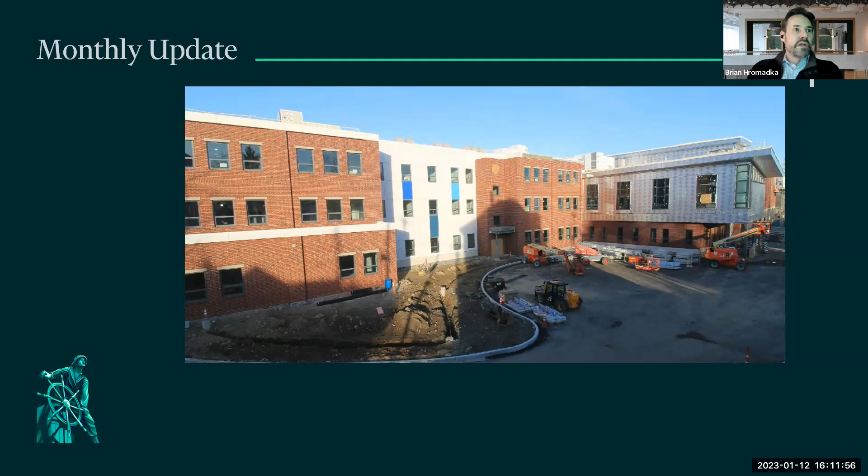So if we go into our summary here, we continue to track on budget and on time, despite the various delays we've talked about in past meetings and also some change orders. We've been able to work through this by managing the cost effectively, doing some resequencing of the work, and making various adjustments to the project as we go along to keep everything moving in the same direction and on time. We've made quite a bit of progress, as you could see on the previous image, on the windows and the curtain wall, and the interior is really coming along as well.

Taking a look at the activities, there's not really much change from last month. We did have 2 holidays, but otherwise the project has been moving forward. We've also been working some Saturdays to make up for the various delays that we've had, and that is helping to keep up with the schedule.

In terms of the project funds, we continue to be in line with the budget. Here you can see this inner green circle continues to work its way up as we get towards completion. You'll notice the designer side is quite a bit higher than the rest, because a lot of their work happened earlier during the project, during the initial study phase and the design phase. So their level of effort right now is not as high compared to those earlier phases.

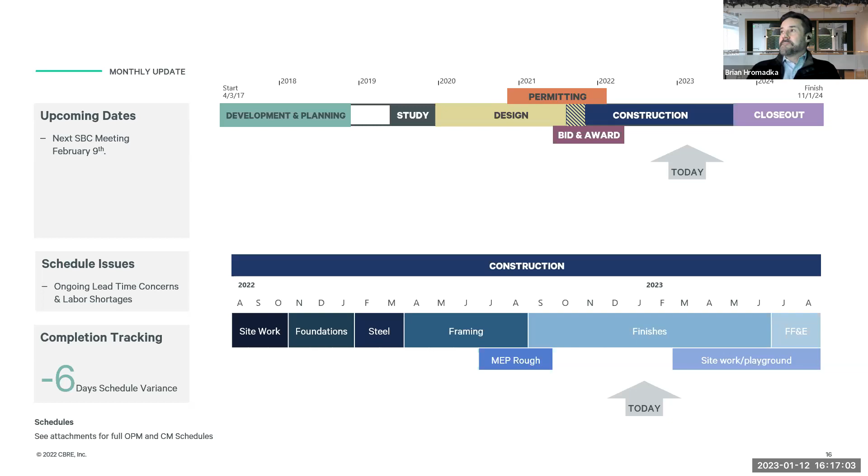So we've also - sorry, I think this slide is missing here. Let me see if I had some images from the teacher tour that Matt did. I don't know if Matt can speak about that a little bit. Sure, let me see if I can.

So last week we had a tour of the building with some of the staff from both East Gloucester and Vets. It wasn't a super large group, but everyone who came through was really excited and thrilled. And of course the whole WT Rich team was very helpful, and Phil showed us all around, gave us some little insights into the building. It was really, really cool.

Okay, Phil was very popular. Let me find the images here. So let me pull that up. Having a little technical difficulty today. I wish I had something more to say. There you go, all right.

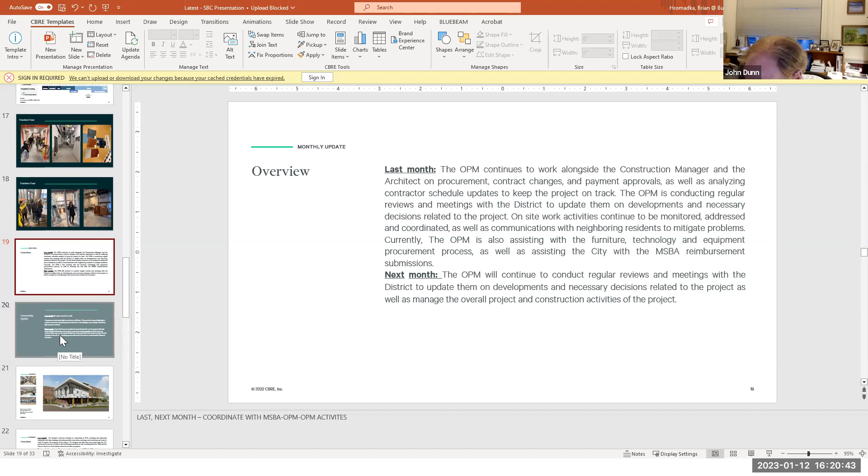Can you provide a little bit of an update? It's in progress, just very, very busy. So we'll try and hop on that tomorrow or Tuesday. Okay, thanks John.

With the community, there haven't really been any major issues, though we did get some complaints recently about some of the noise with the Saturday work, and we've worked to address that. We talked with WT Rich's team, trying to make some adjustments to the timing. There really isn't a lot of activity going on, but with the remaining windows that need to be installed, they have to get up on a lift, and those lifts have little beepers so that when they're moving, people are safe around them. So that is a little bit of a disruption, but that should be wrapped up very quickly.

We do continue to send out emails and notices for any changes to what's happening on the site that might impact the neighboring community. We will have two large deliveries coming up in the next few weeks, and then a couple more towards the end of the month for some of the casework and millwork that's going to be installed.

So there will be some of that, but we've had similar size trucks in the past, and they've been able to move to the site quite easily without any problems. So I don't expect that to be an issue. Moving on to the designer update.

The design team continues to be busy overseeing the conformance with the design documents in terms of what's being built, keeping up with the level of RFIs and submittals that are coming from the CM. They've also been working on wrapping up the furniture package, and we'll be moving into getting the equipment selections done with the administration in the next month or two.

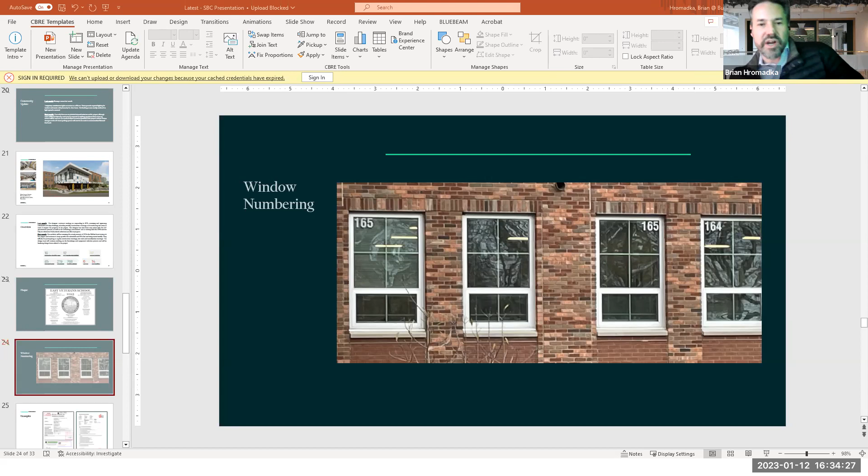It's not something that we've seen on a lot of schools around here, but just recently when I was traveling in a different part of the country, I did notice a lot of the schools out there had this type of numbering on their windows. So it seems to be maybe something newer that schools are doing. But yeah, Ben can share a little more about that.

Thank you, Brian. So as folks may not know, on school buildings, including ours, we have all the exits numbered, the doors are numbered. That helps with emergency response, if first responders need to enter a specific door closest to whatever they're responding to. We are currently in the process of a project to replace all the original windows and exterior doors at O'Malley.

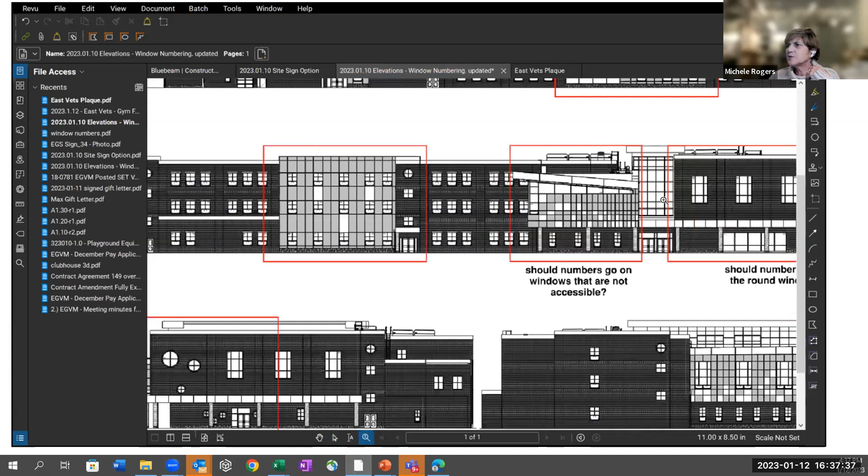So what happens is we begin to number the windows, and you can see here that the windows get numbered. This would be room 000 and 002.

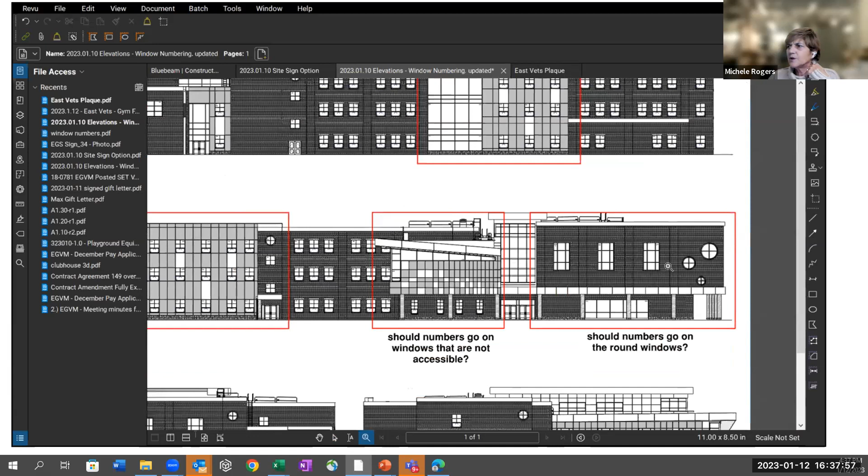And as we move into the classroom wings, you begin to see the different classrooms and how the windows stack up. Some of the questions we have are, do areas like the round windows, do we add numbers to those?

And what about areas where the windows are too high? This would be the art room storage area, and this is the beginning of the art room. Do we number those windows there?

They are out of reach for students, so it's not like you would be helping a student escape from a window of that sort, or even probably entering the window, because this is all part of that classroom.

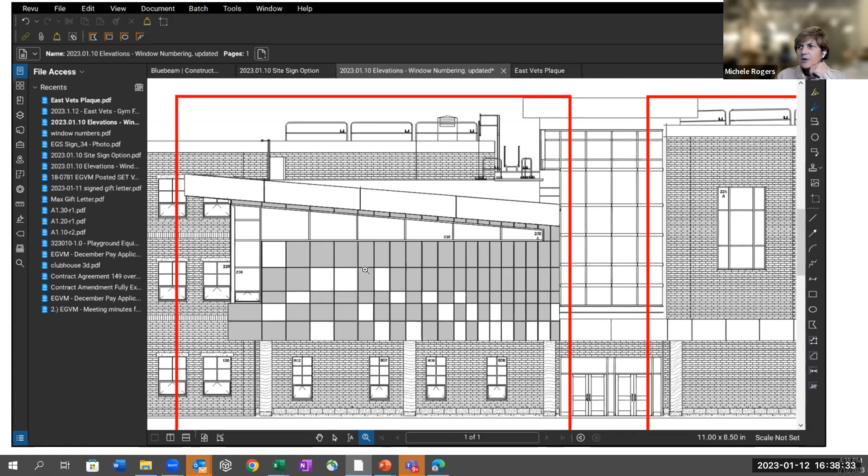So some of these windows we want to talk about independently. We also want to know about windows that are super high, like within the stairwell.

The stairwells are numbered, but does the top window get numbered as well? I don't know if anybody has any thoughts about that at the moment, but we can talk about that.

And then in the extended learning area, you would have each of those areas numbered within those larger panes of glass.

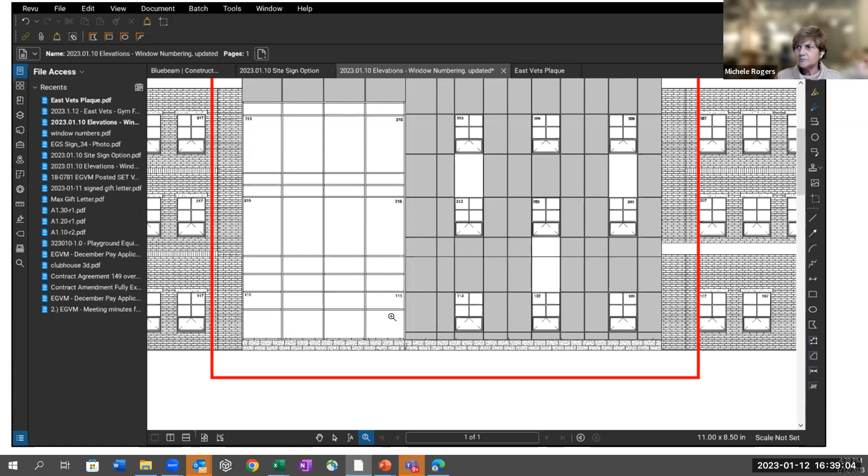Okay, any comments, any ideas? Well, I don't think that it's necessary to number those big round windows, because we know that's the gymnasium. I think everyone would sort of know that, but that's just my opinion.

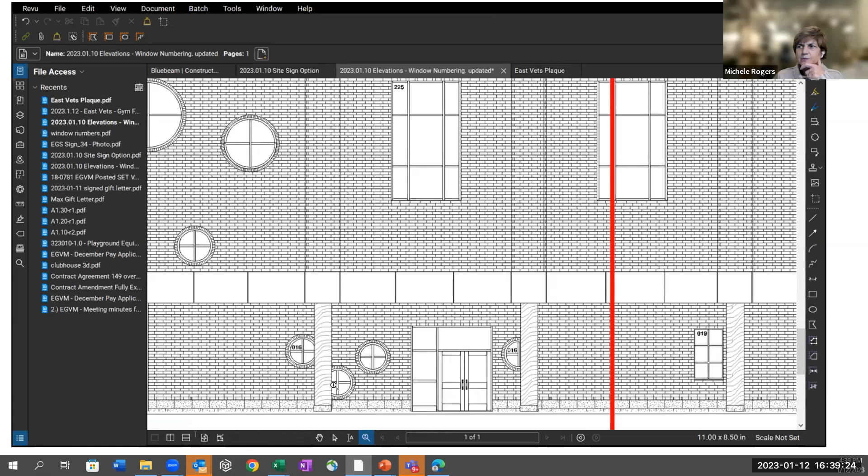Right, the door will be numbered, and you'll be able to see that this is part of that same vestibule. And when we turn the corner, the large area of glass in the cafeteria has a number on it.

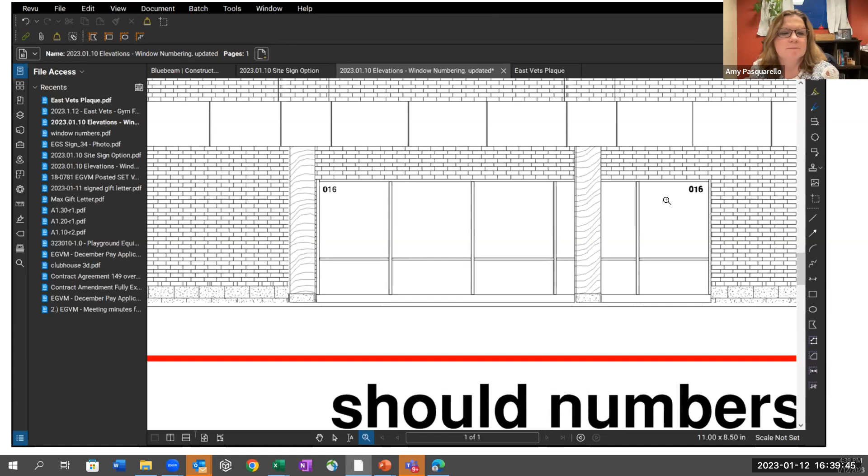I don't like numbering the round ones. No, thank you, I aesthetically agree. It doesn't look good, they're decorative.

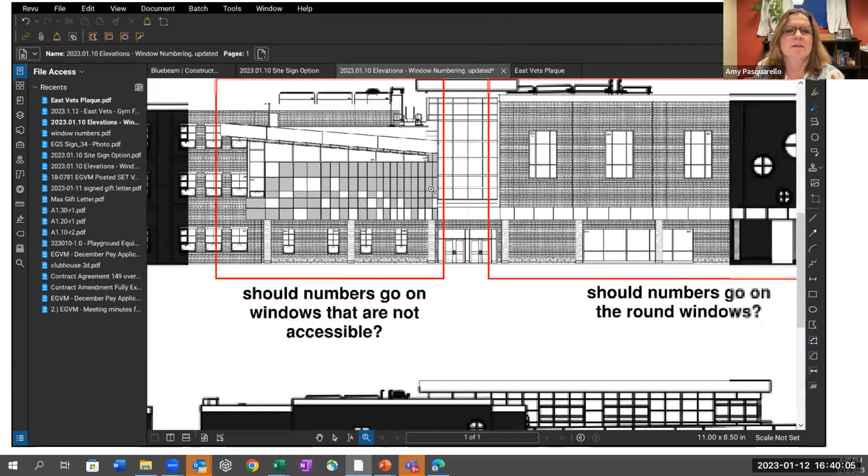And I also don't think it makes any sense to put numbers on the windows that are the clerestories up high, that's just not necessary. The art room, I agree with that. Art room and the art storage is not necessary, and the top of the stairwell. Michele, can you go to the art room?

So this is the art storage room, and then the art room starts here and goes all the way to the end. This is the back of the building, this is the front.

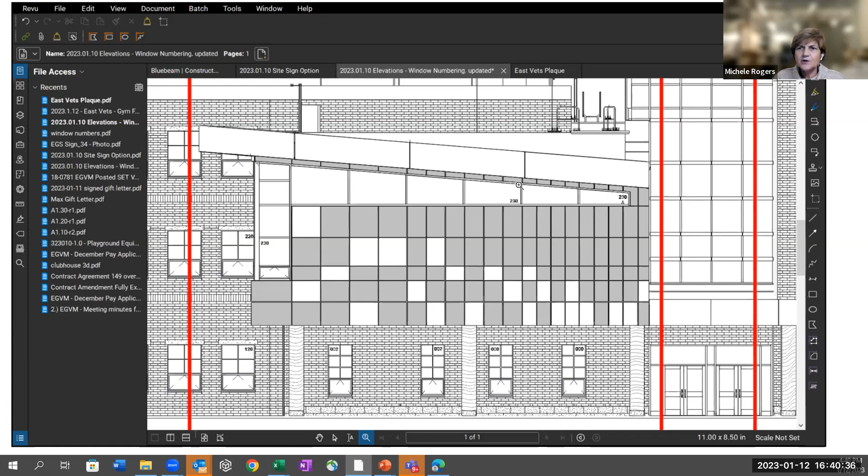Tony, you're on mute. We wouldn't have an identifier where that room ends if we didn't have that second one. It's in the third pane from the right.

Well, this particular room, not that one. You wouldn't know that it ends there.

You'd know these windows are quite high, but I know you're talking about identification from the exterior.

So if you don't have anything on the window where the room terminates, I don't know, if there's something going on in that space, how are they gonna know where the room terminates?

Do you understand what I'm trying to say? What's happened at other schools is that they would number the first window in the room and the last window in the room, so that you could figure out where the space begins and where it ends. That's what this is, the first and the last.

Yeah. So are we talking about not having that last one on that high window?

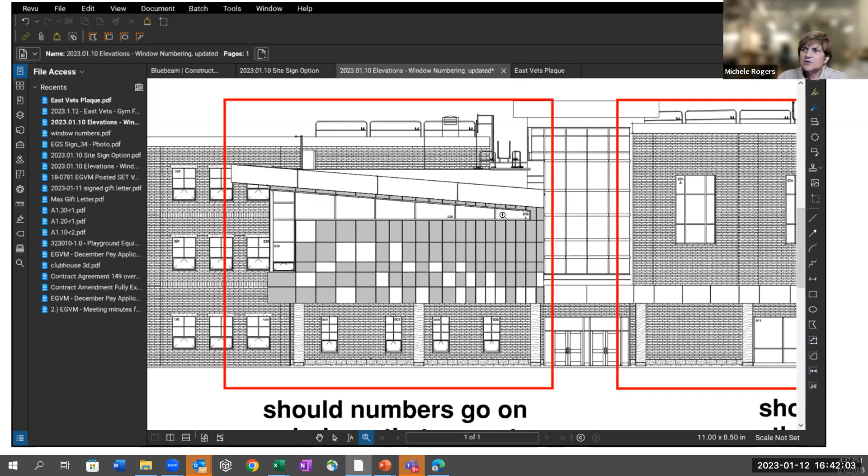We'd actually also have a number in this window here, which is the storeroom number. And if we think about it, it actually spans the entire length of that art room.

I would think it would just be like for all of the academic spaces, primarily maybe the stairs, and then maybe we could get some guidance from public safety in terms of, do they need a start and stop, or do they just need one per room? You know what I mean?

I mean, what is the signaling, what is the message that goes to public safety from whatever's happening in the school? My theory is, we're in the art room, it's on fire, they're gonna know where the art room is.

It makes it important for the other rooms, the non-recognizable rooms, but the gym and the art room and the cafeteria, that's what people are going to say. They're not going to say I'm in room 107 and have it be the art room, I don't know.

I think that's right. And they'll also have the evac plan. Yeah, so the evac plan will correlate to the room numbers.

And so I would think, but again, maybe we can get some confirmation from them, that so long as we have a number on a window in the room, I would think that would be what they would be looking for.

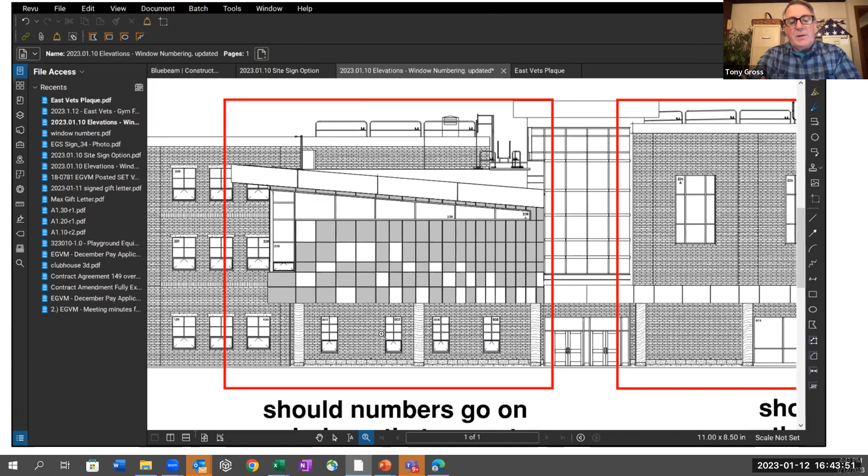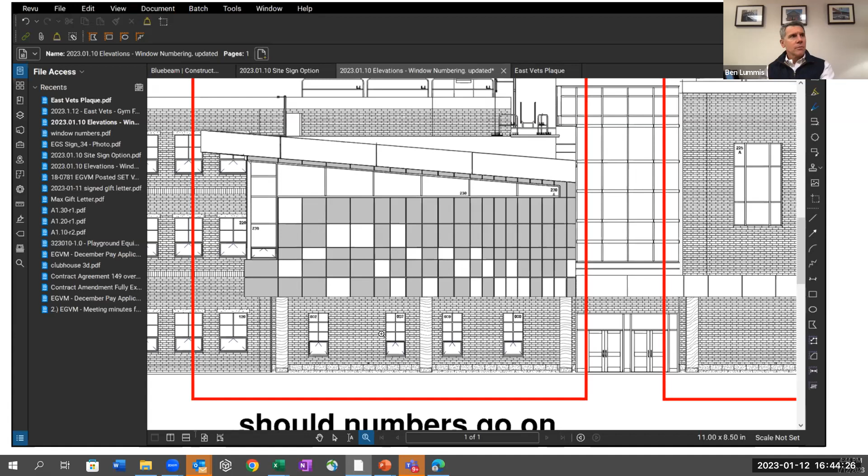Ben, did I hear you correctly that the chief of police and chief of fire asked for it to be on both ends of the room? I'm just checking now. I thought that's where that idea came from. I can't remember if it was from them or from our designers. Hold on, let me try to track this down. If folks keep going, I'll see if I can get the answer for you.

I think what we want to do is see if there's agreement to move forward with this. Sounds like people understand the additional layer of safety provided by putting the numbers on the building, and also understand this would be an additional project cost. We don't have an exact price until we get the details figured out, but we're probably in the range of maybe $8,000 or so, plus or minus.

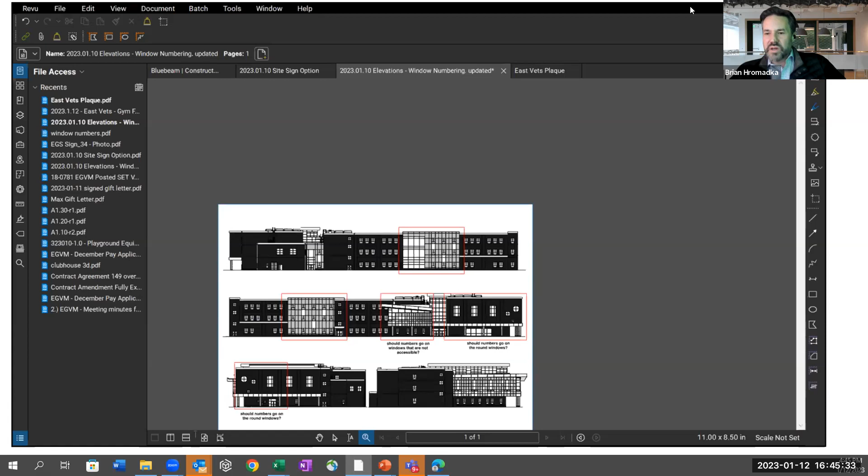So what would they be, vinyl stick-on numbers, or painted on? I think the police or fire provided an example of what the numbers would look like, reflective film numbers stuck to the windows, adhesive film. And to respond to Tony's question, that suggestion about the first and last window came from our designers on the mailing project.

Thank you. I just think on the major rooms where that is an issue, like the cafeteria and the art room, that should be recognized - you say we got a fire in the art room, and since they have the evac plan and the floor plans, this makes it a little simpler, especially being on site there.

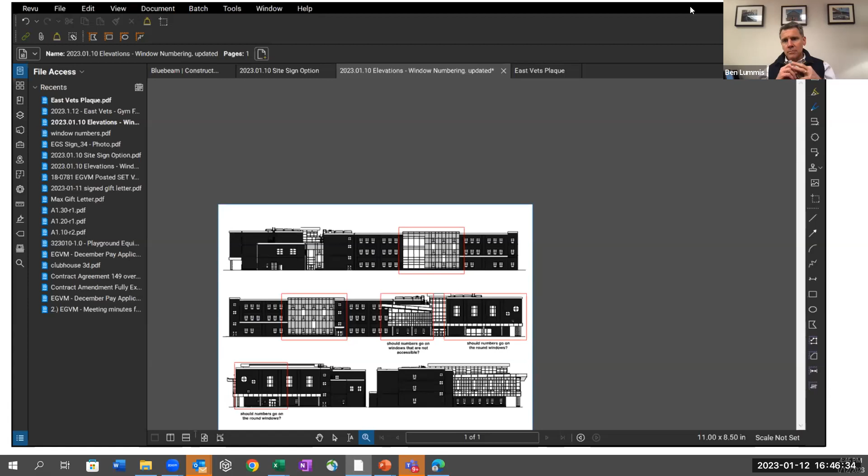But Brian, would it be okay for us to put forward a motion and leave some of the detailed blocking and tackling to the project team? I suggest we have a motion to move forward with this, with the understanding of generally what it would look like and the costs associated. Then Dore and Whittier can provide the information we currently have to public safety to get final comments on whether we need an additional number in this place or that place.

Just one more question - do we want to label it with the room number for the art room, cafeteria and gym, or with art, gym, and caf? I think those are details we can work out with public safety, that's really who this is for. That's a good question, Nick, because it does make it a little easier to recognize.

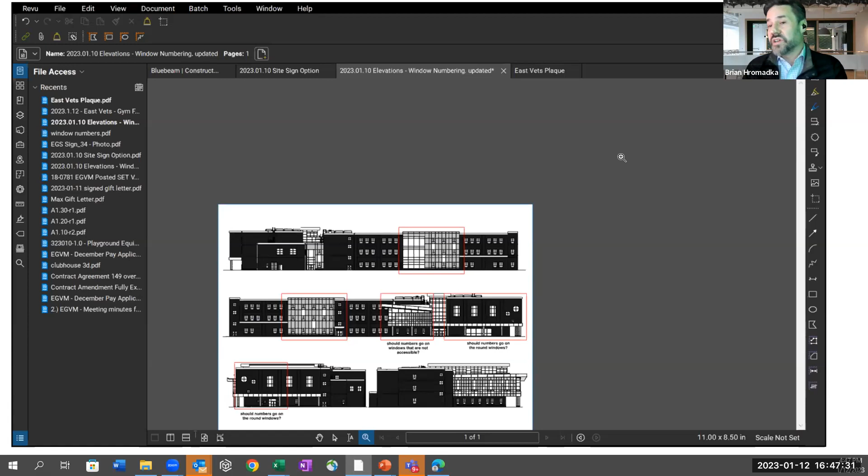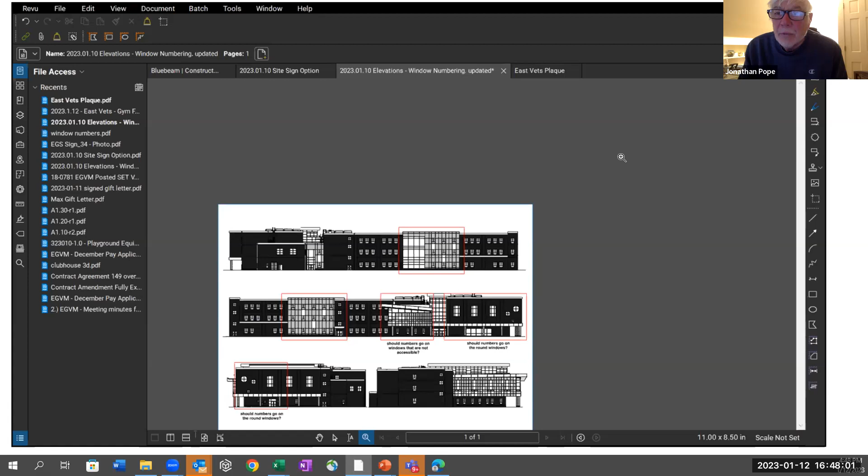I'll make a motion that we authorize the designer and project manager to consult with public safety about how they would like to have rooms numbered, but to proceed with a plan and proceed to number the rooms on the windows. Second. That's kind of vague, but it's the best I could do. Good effort. Any discussion? Okay, can we have a roll call vote?

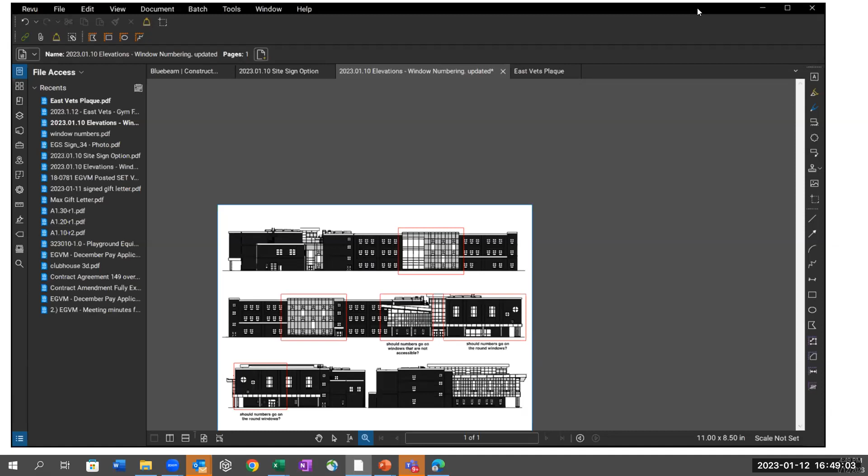Jonathan Pope, yes. Ben Lummis, yes. Katie Clancy, yes. Richard Safar, yes. Matthew Fusco, yes. Amy Pescarello, yes. Grant Harris, yes. John Dunn, yes. Gary Fish, yes. Caitlin Nunes, yes. Tony Gross, yes. Stacy Cabon, yes. It passes unanimously. Thank you very much.

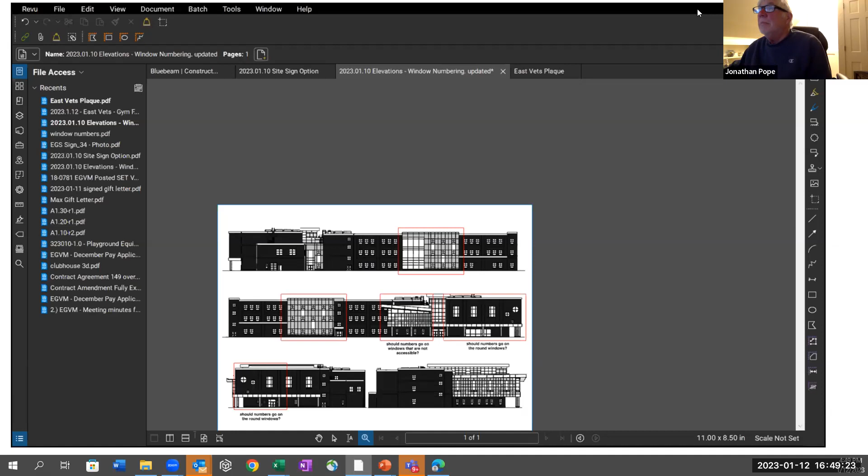So if we can switch back to Michelle on the exterior. Oh, there we go, exterior sign. This is also something we've been reworking to get it just right, so this is the final iteration that we have. Michelle, you can talk us through some of the changes that were made and why this is what we have here today.

We presented the working group with a couple of different signs and different options for materials and dimensions. What we wound up with was going a little shorter in size and longer in dimension, which helped spread out the lettering on the name as well as shorten the overall height.

So the sign itself is more rectangular than square. What you end up with is a sign just under 5 feet tall. The top is cast stone, and the base veneer stone matches the stone on the building, and the brick veneer matches the brick on the building. The address will be 5-inch letters, and the name of the school will be 7-inch letters.

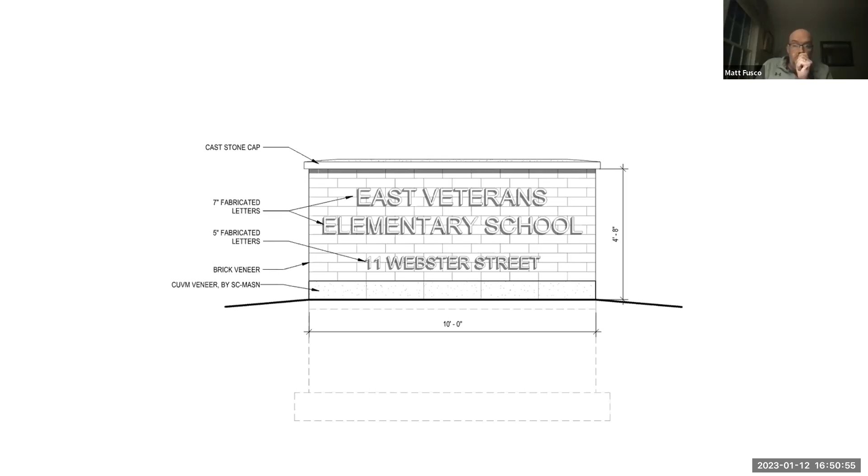If you look again, using West Parish as an example, the 7-inch letters are what we have over at West Parish. The address was only 4 inches over at West Parish, but it's slightly larger here.

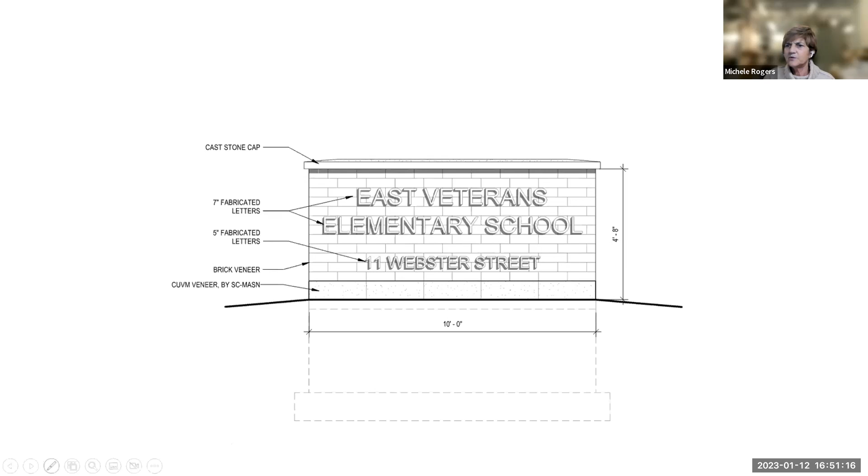Let's move to show how that's going to look with the building. You can see it here. It sits out front between the two entrances, the main entrance into the school and the bus entrance. As we move around, you can see it from the other side. It's double-sided, so you'll see it going both up and down Webster Street. I also added a few of the numbers in back there, so you can see what that looks like too.

So this is where we landed for the sign. I don't know if anybody has any comments about it.

I like it, I love it. All right, I'm done, I'm going to quit while I'm ahead. Two votes for it, I think it looks great, really nice. I think Matt's upset there's no statue of him up front. That's coming, that's what the art garden is for. It'll be a cardboard cutout, we'll take it out at the holidays. There's a spot, there's a spot.

No, it looks good. You're not going to plant a whole bunch of shrubbery in front of it, right? Just a couple of things. I'm glad you said that, because we need to make sure we don't block the cameras. Don't let the trees grow up and cover the cameras.

Can we get those two photos sent to me, Kathy Clancy, Amy, and Matt? They're great — renderings, I guess, not photos, but they're great renderings, and that's why I want to have them.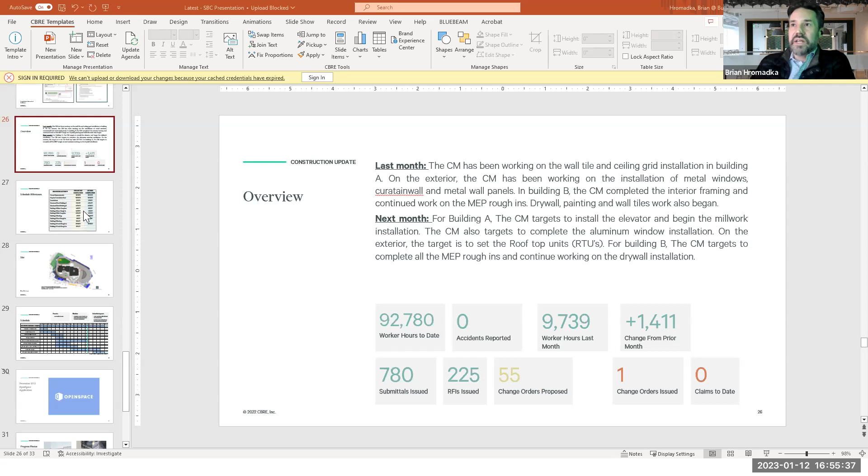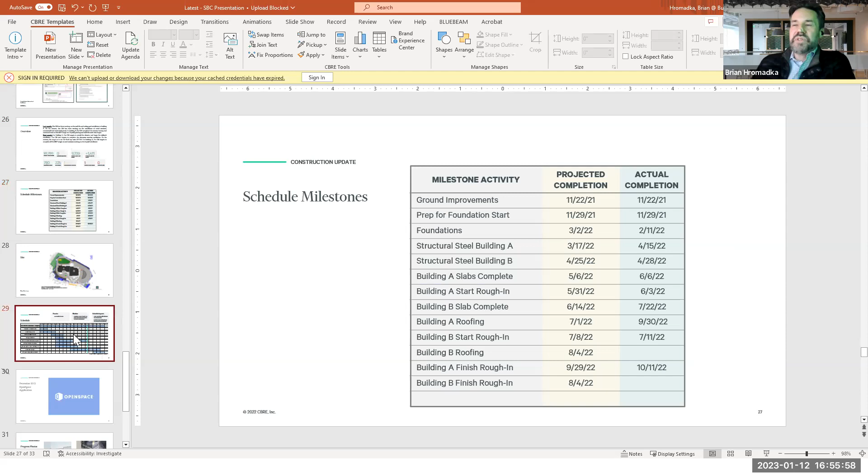So no new updates on the milestones. I think we've talked about this before. These are milestones that were created at the beginning of the project. The actual completion on some of them is earlier and some of them is later, but that's because of a lot of the changes that had to be made in the sequencing of the work due to various delays. But we're still overall tracking ahead on time.

We've also had some weather delays, not a whole lot. We've actually been very fortunate in general with our weather this year. It's allowed us to do a lot more work on the exterior than we would have otherwise. Even today, we had site workers doing some excavation and backfilling. So that's really been very helpful.

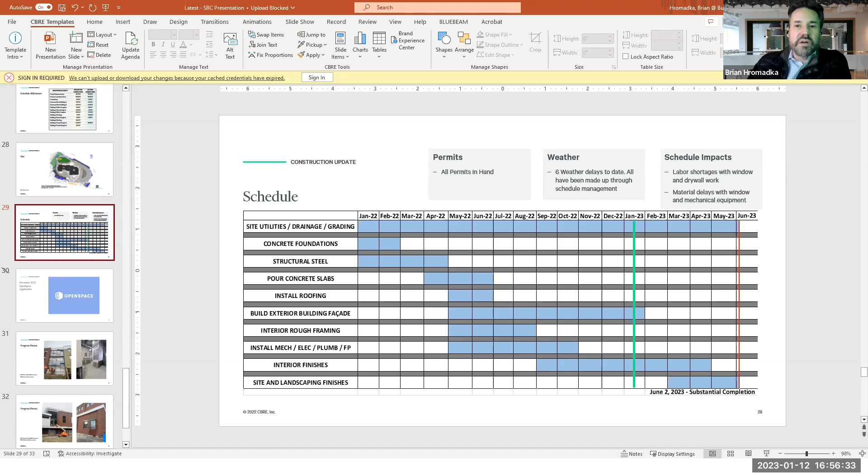So I can turn this over to Alex to do the OpenSpace walkthrough. Thanks, Brian.

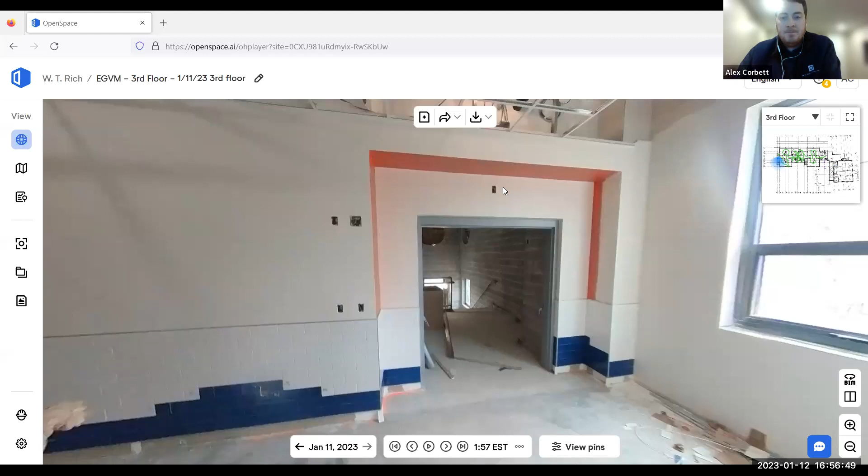Can you guys see my screen? Yes. All right, so I'm going to bring you through the third floor. Matt and others may have seen this already, but I think it's good visually to kind of refresh a lot of the people that didn't get a chance to walk the other day. So, as Brian mentioned—Alex, that's Tyler, right? Correct, yes. Wow, yeah.

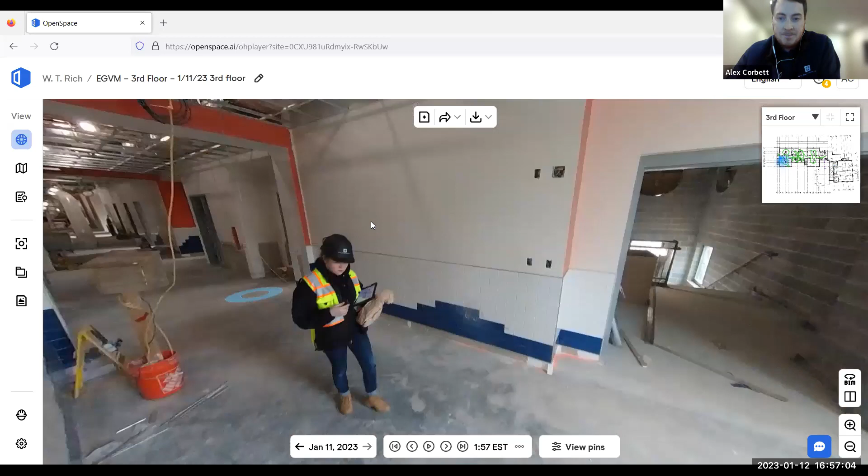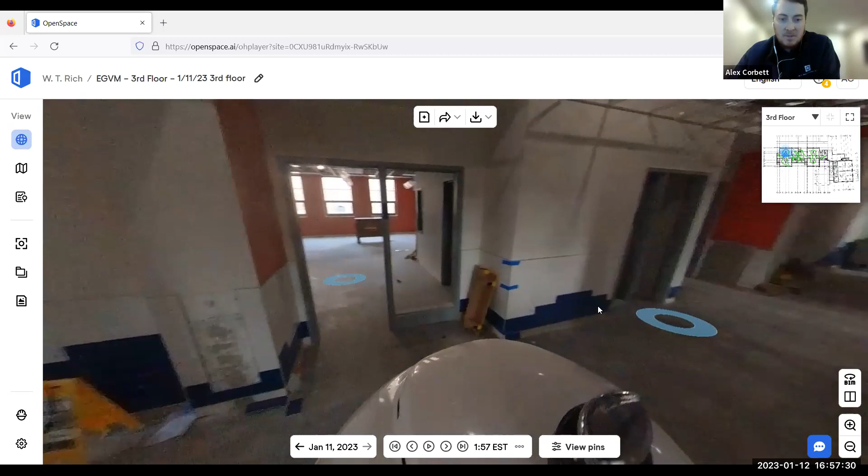So yeah, we've got drywall accent paint colors starting to go up. Actually, all the walls in the corridor are actually painted. We've got a good push on our ceramic tile. As you can see, I won't try to describe what it is, Michelle, but I believe it's something to do with water and waves. The wave. Yes, it is.

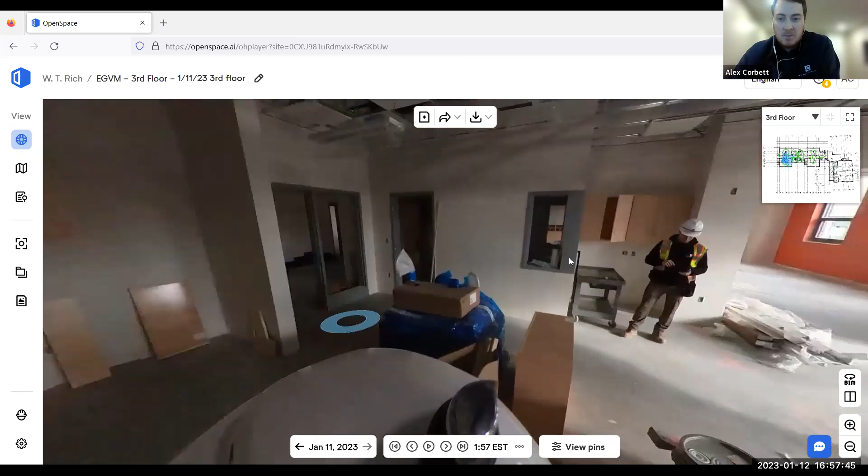So I'll take you into one of the classrooms that's actually got millwork starting to go in. So obviously we don't have the permanent lights in yet, but you can start to see how some of these rooms are fitted out with the casework that's coming in.

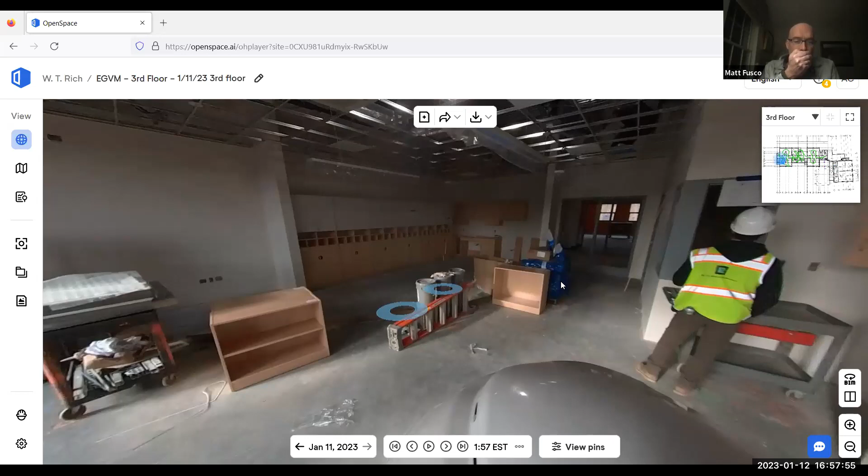One of the challenges we face is obviously, as some of you may know, casework, wood in general is tough these days, especially coming from Canada. So these showed up a few weeks later than we really wanted them to, but the guys are doing a pretty good job of getting them installed quickly.

So you can see those cubbies, large tall cabinets. You've got 2 sinks on this wall as well. You can start to see the pendant light fixtures being installed here. And then the window wall, you can really start to see how that's coming along with the accent and the built-in cabinets and the window bench that we were able to get back into the project, which is a nice feature into these classrooms. Awesome.

You can also see the track for the folding panel partition. So that's kind of the divider wall between the 2 classrooms, as you guys be aware of. We're expecting flooring to start going down the next couple weeks. That's that marmoleum vinyl tile that a lot of schools are starting to use now. So the next couple weeks, these rooms are going to get pretty much in good shape to finish off.

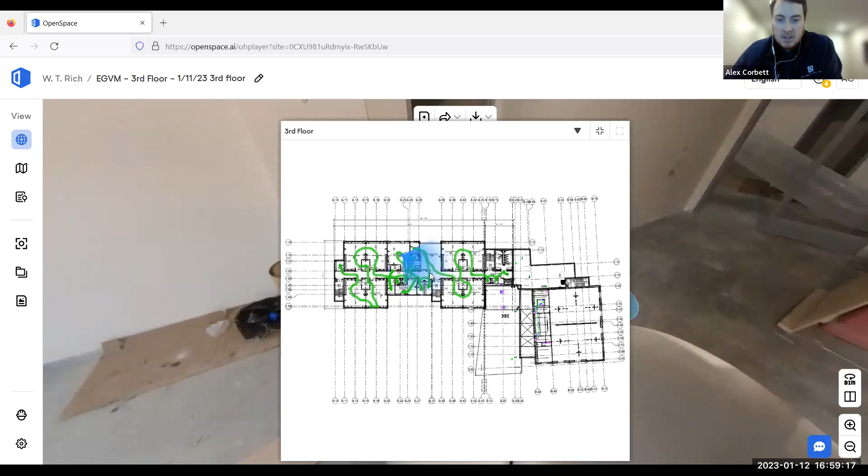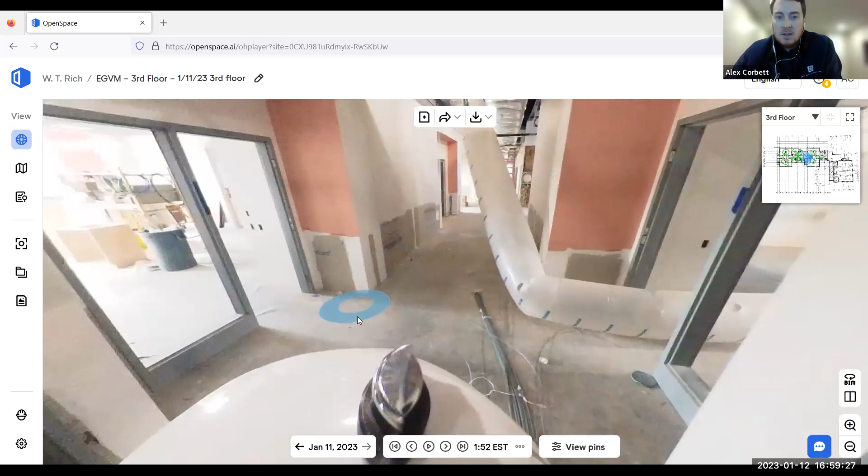I'll bring you down. Let's see if I can get more of the corridor here. We're working our way, I guess west to east, in terms of that wall tile that you saw in the previous photos. Let's see the paint colors as they change from corridor to corridor, or pod if you want to call them. The cluster of 4 classrooms, I believe the color changes there.

Michele, again, feel free—no, you're doing a good job. It changes per grade level. So if you have 2 grade levels on the same floor, the color changes. Yep.

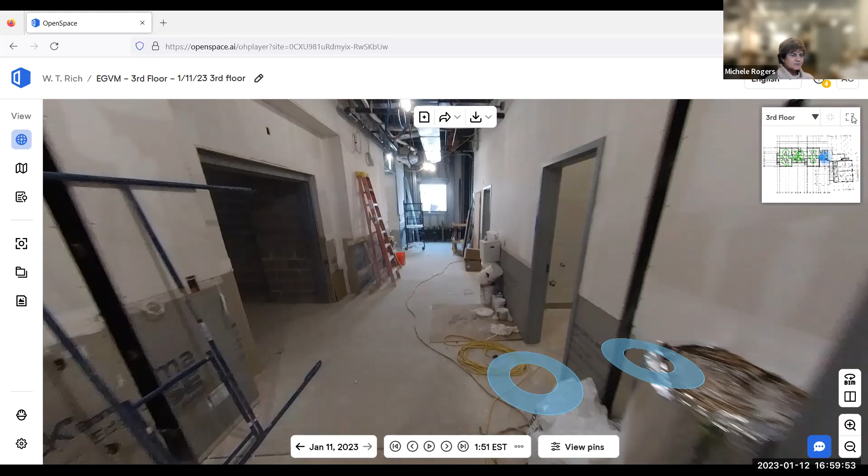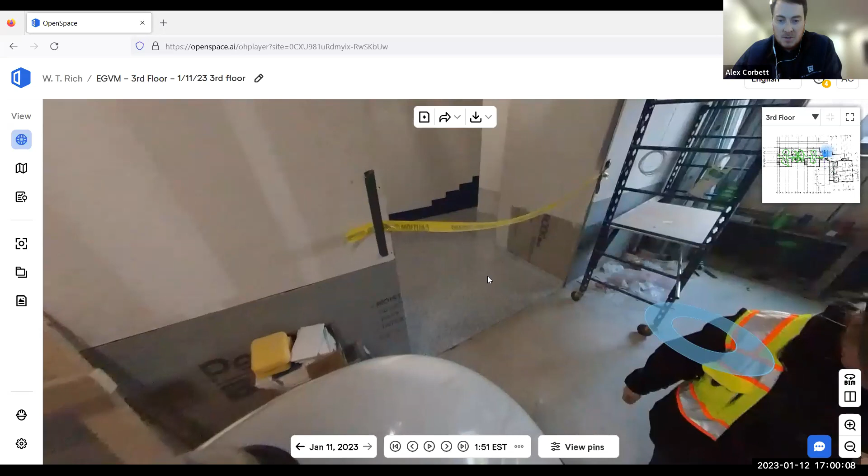I'll just bring you down towards the end of this corridor. This is one of the first multi-student or multi-user student toilet rooms. You can kind of see here, we have that epoxy floor that was just installed. It's like something that you see in the garage, obviously much nicer for the school, but it's got that flaky resinous material. You can see the wall tiles complete in this bathroom.

So we're working our way out of those bathrooms and wrapping it into the corridor. I wish the photo was a little bit better, but trust me, it looks pretty awesome.

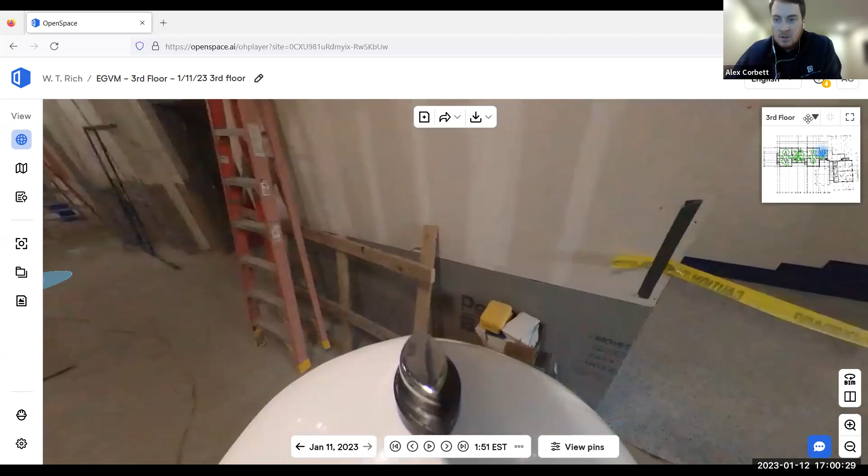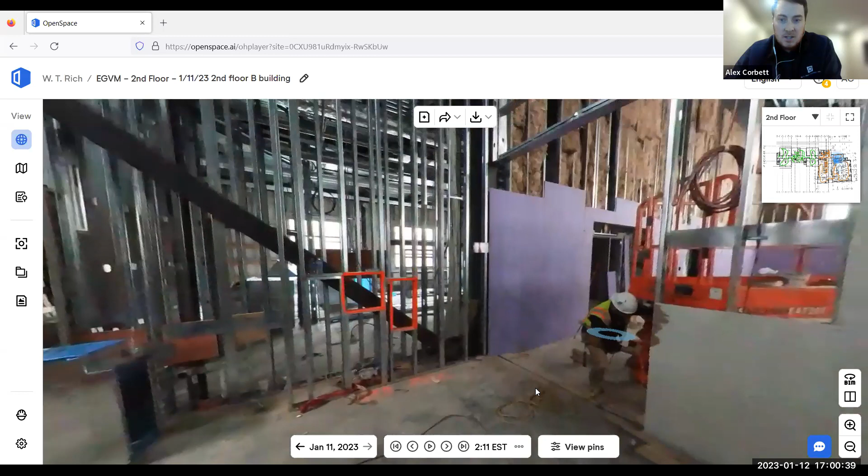I'll bring you down to the 2nd floor, some of the larger spaces, like the gymnasium here. We can get in there. Starting to board the gymnasium, insulate and board. Looking at the stage and the proscenium that'll ultimately get boarded and finished off with millwork surrounds. But you can start to see, when you're in the space it felt big, and now being finished it really kind of starts to feel like a gym.

So in the next couple of weeks, we're going to paint out the ceiling, paint the walls, and then get the gym equipment starting in there. So this space is going to come along pretty quickly as well. You can see those large round windows that you probably saw from the exterior.

Some of those spaces - we're actually standing on the stage right now. Let me take you to the art room.

So, workshop area with the kiln here, still needing to be framed, but again, for the most part, the art room has taken its full shape.

This is the overhead door. It's sort of a decorative glass garage door, for lack of a better term, but it's going to be a pretty sharp opening between the art room and the media center.

Let's see if I can get you in the media center too here. Look at those beautiful wood beams - yep, so you can see the glulam.

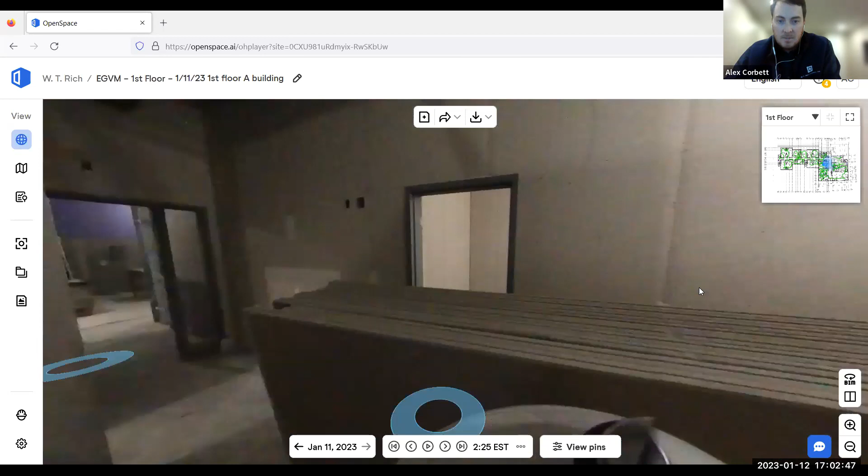Admin's taking shape really nicely. The lighting's obviously not great here, but we're essentially all boarded out in this admin suite - all offices, nurses suite, principals' offices as well, all boarded out. It doesn't really do it justice through this walk, but you can really start to see the size and the makeup of those rooms.

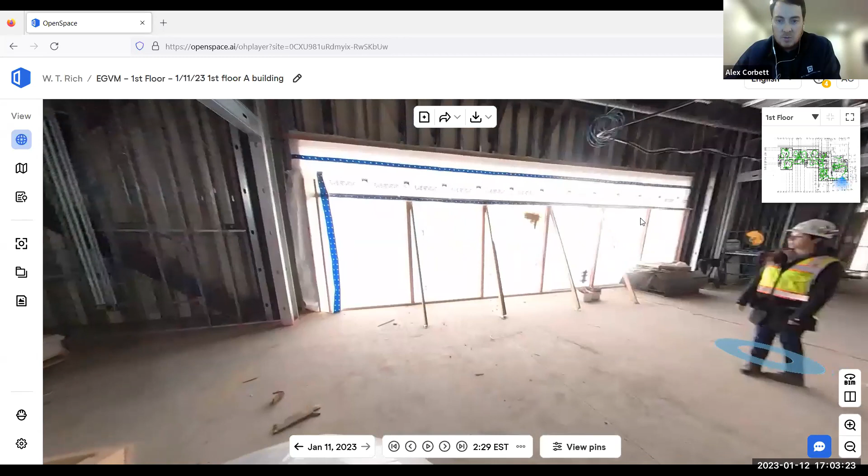The cafeteria - you've got another roll-up door here. It's a roll-up grill, actually. And then you get into the kitchen space.

Actually, this is the custodial area. Let me see if I can get you in the kitchen here. Yep, here we go. So this is all going to be trimmed out with stainless steel, food service equipment.

There's a wall right here with additional food service equipment on that side. This is actually the cooler freezer void, so we're going to start getting the cooler freezer in. The hood for the grilling apparatuses will go in as well. And then we've got a single user toilet room in the kitchen staff office space back here.

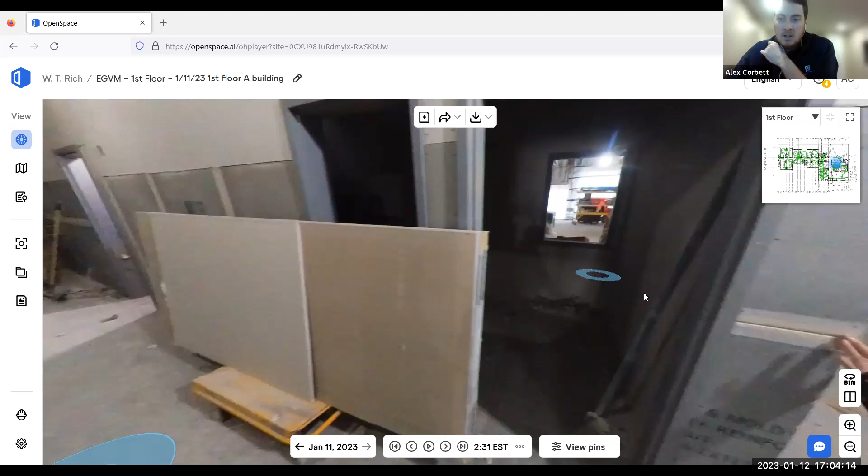So hopefully the third floor A building classroom wing gives you a good insight into how we're progressing on second and first floor. And then obviously you've got some atypical spaces in B building with the gym, the art room, the media center, and the cafeteria.

Does anyone have any questions? Tony? Yes, Alex, I got a couple.

On the schedule milestones, it has building B roofing not complete - what's left up there, or is there just no date on the actual completion? The roof's complete, it may be some accessory things, but we're completely weather tight in B building. What we consider roofing complete is basically weather tight, able to do stuff below it.

Maybe throw a date in on that then. Yeah, and in the latest update I saw that too. I was on the roof today and everything was tight, so - well, I would hope so.

Also, Alex, you mentioned that the tile was complete. Is that stair step type image? Is that how it's going to be, or is it going up the wall halfway as far as the Durock? It's just a wainscoting, I think it's 3.5 feet high. It does go up halfway.

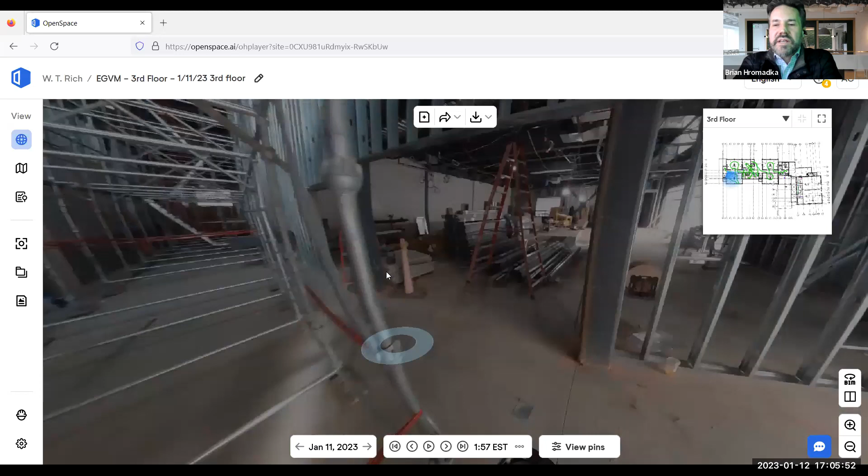Okay, so it's white tile, so it's hard to see in that photograph. Oh, I see it now - this is the top of the wall. Yep, I see the white tile now.

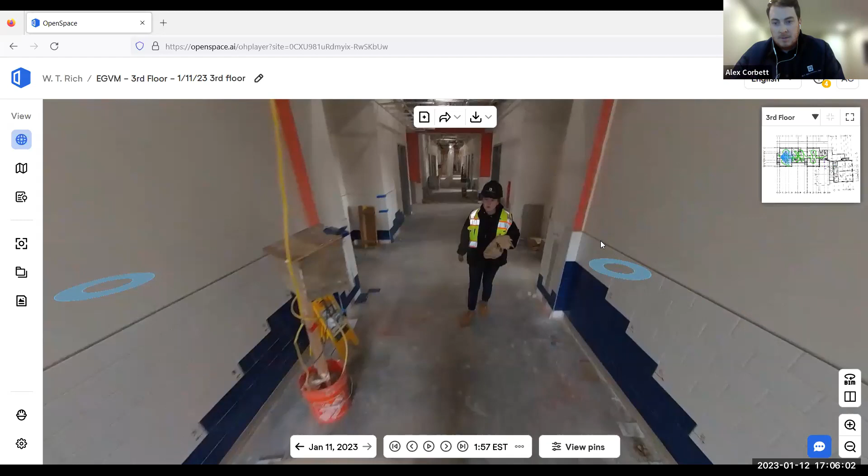In the gym, is there going to be any kind of protection on the walls going up 8 feet or anything? So we have wall pads surrounding, right? I believe those are 6 feet high. So yeah, you should be pretty well protected in there.

Just a quick question - is there a dishwasher going in this building or no? Yes, that's weird you asked that because we were just talking about that today, because I know we didn't put it in West Parish, right? Yeah, you've got a pretty robust dishwashing system here. I'd be surprised you didn't have one in West Parish, but - yeah, we had it and took it out. It's a long story.

Oh, you guys are doing paper over there, right? All paper or something? Yes, we had to go to compostables, not combustible - yes, compostable. Hopefully not combustible. Probably not, not combustible please. All right, thanks.

Okay, yeah, it looks great. It's amazing to see the tile and the colors on the wall, the accent colors up there. That's really surprising to me, and it looks great.

Yeah, I can't tell you how relieved I was to start seeing that casework and millwork stuff show up, because as I mentioned, it's industry wide. That is just a nightmare right now. So I could sleep easier knowing that some of it's on site at least.

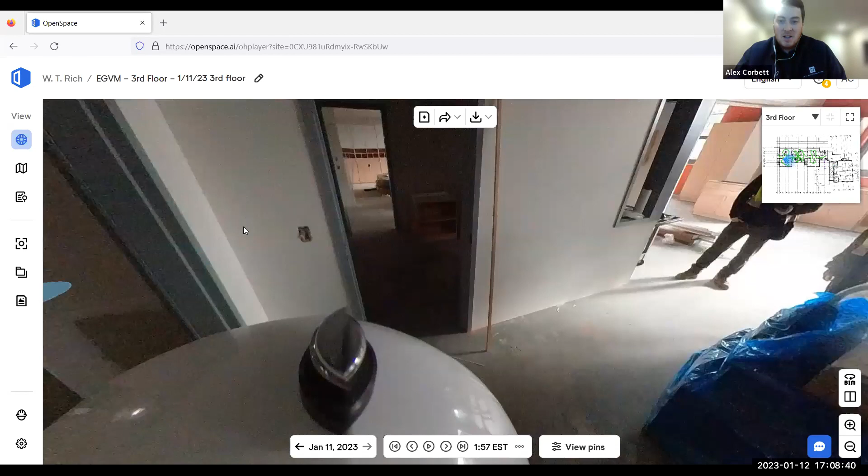I like the detail on the cubbies with the little circles for opening the doors. I think that's very cute. And Matt, thank you for getting us an answer on those locks - that was a big help for us today. Just continuing that little circle theme there. Oh, I see, yeah, cool.

Great, okay, all right, thank you very much, Alex. That pretty much wraps up our update and all the items on the agenda. So we had a few technical difficulties, but we managed to get through it okay. Anything else to be brought up before we adjourn?

Thank you, Jonathan. Just at our next building committee meeting, Brian, could you guys introduce us? I don't think you've done this yet - just help the committee understand about the commissioning and the commissioning's role in the process. Or did we do that in December?

I know we didn't do a big presentation about it. We may have mentioned a little bit, but we do have a commissioning agent that has been active already for some time on the project. Initially, they were reviewing the submittals as they came in. We had someone out, I think, yesterday to do some initial inspections. So NV5 is our commissioning agent, and Mike Papagani is the person who's kind of heading that up. They're going to get more and more involved as we go forward.